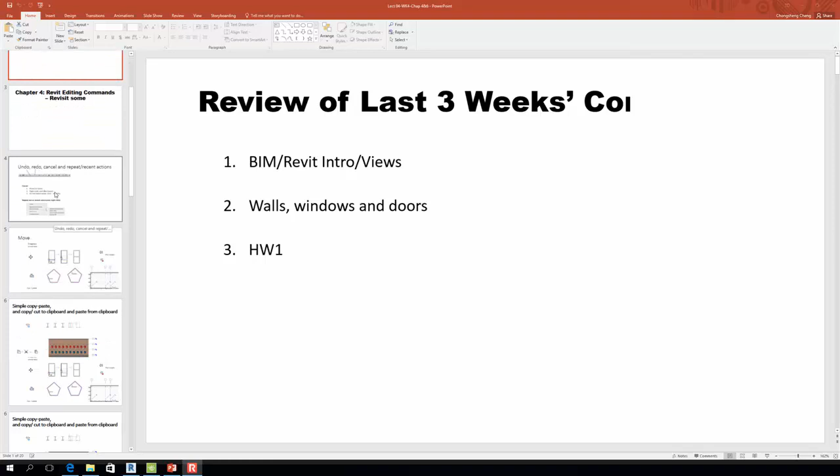So maybe in the first couple of weeks we try to bring everyone to the same level. I'm going to continue to do some review, especially the view part, and also the wall, window, door part. Then we'll move on, and also part of the editing - some editing commands - then we move on to the floor part. The editing part is important, but I don't think it's worth having a full lecture just covering how to trim stuff, how to cut stuff. I don't think that's a good way to deliver that.

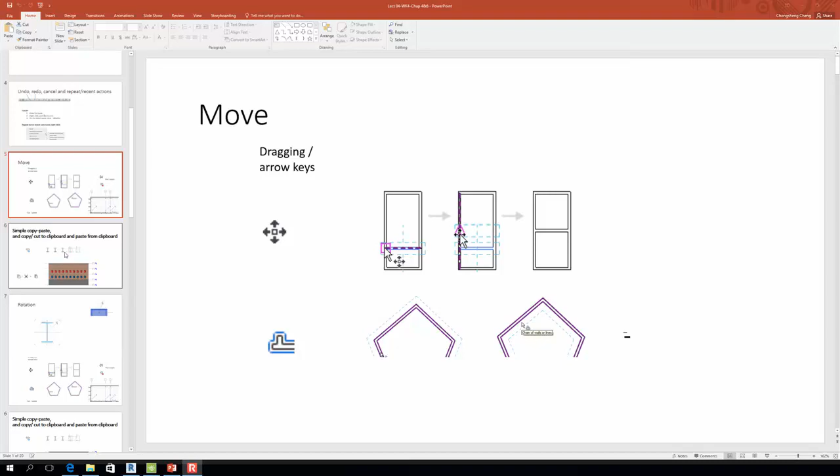So instead, I'm going to try to mix those editing commands with the bigger topics we talk about - wall, window, door, floor, roof. I'll try to mix the editing commands with this bigger topical content. Hopefully that works.

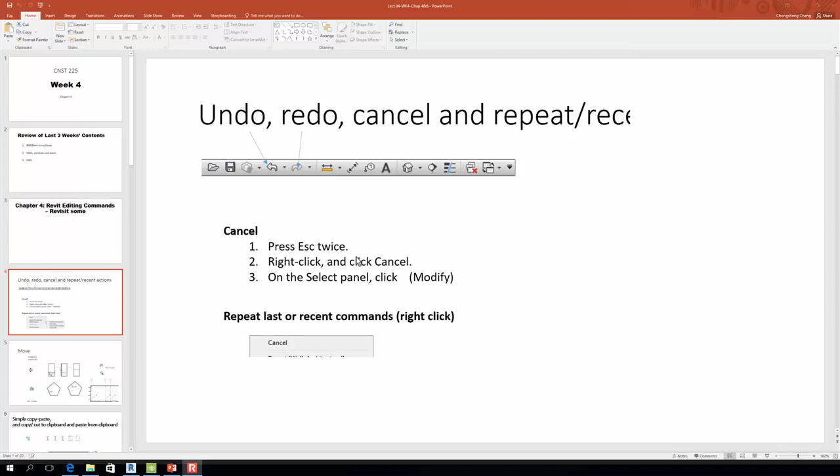Okay, then as I said, we're going to take some time and also learn some new stuff in the floor part. Before I start, I want to say it again: for this whole class, we only use architectural templates. And second,

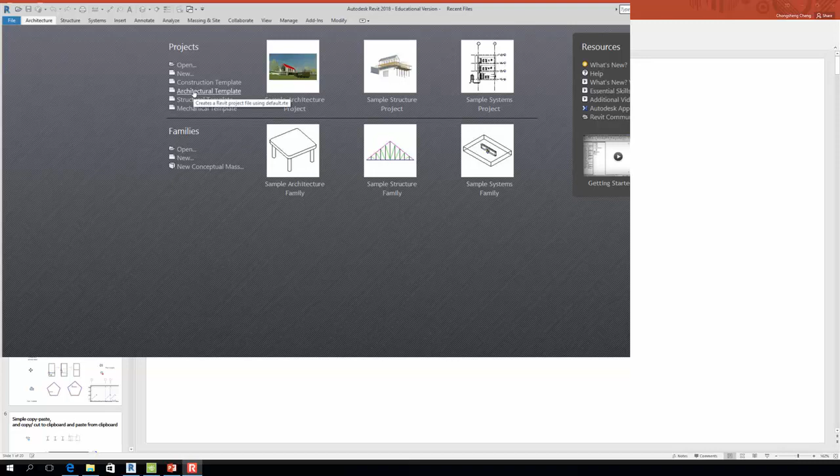all your homework, any assignment, you're supposed to save as a project file. Project file means RVT - Revit file. So when you submit it, you can see the only format you can submit is the project file, RVT. If you save as a template file, you're not able to submit. There's a good reason for that. If you go to the architectural template, that actually creates a new project for you.

As I said, I'm going to do some review. I'm not sure if everything was covered by the TA in lab time, but for example, this interface - if you somehow accidentally close this, say you accidentally touched a button, then your property window is gone and your project window is also gone, how are you actually going to get it back?

Remember, this is a view question. If you go to View, there's a user interface option on your far right - that's where you put them back. You can see the project browser comes back, and then you see the property browser. Try to keep these two areas active - keep these two browsers open. Most of the time you need to do that.

That's how when you accidentally click on something, you can get it back. There's another one called the system browser, and you can click on that - you can see there's something here.

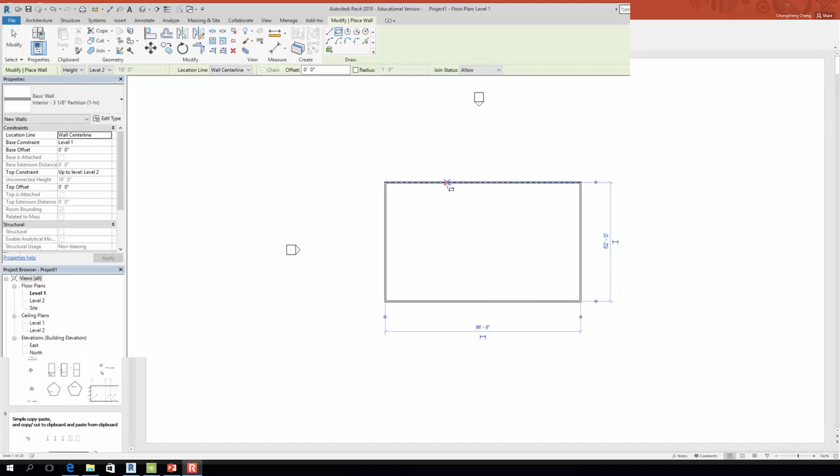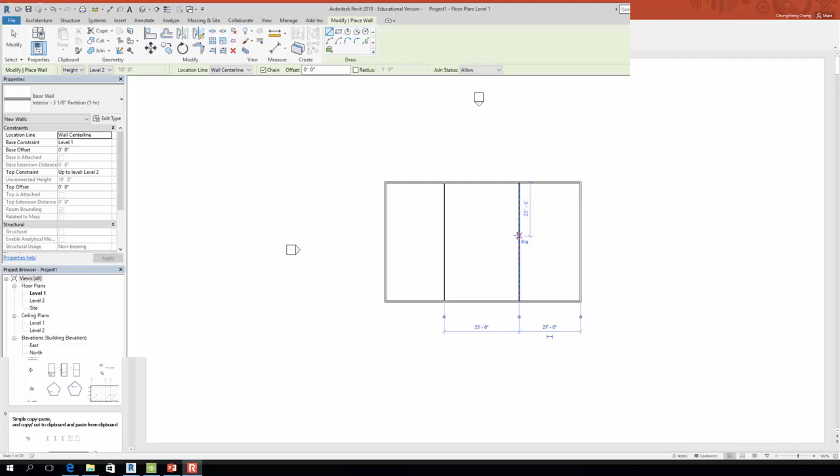Then you go to draw an interior wall. Pick 3 1/8 inch, or whatever, 4 inch, and just make sure it's an interior wall. Just randomly draw a couple. Sorry, you need to use a single line instead of a box, otherwise you're going to have another box. So go to a single line - you can do something like this, just do some kind of random stuff. If you want to draw a little more, you can draw a couple more lines, maybe one more here.

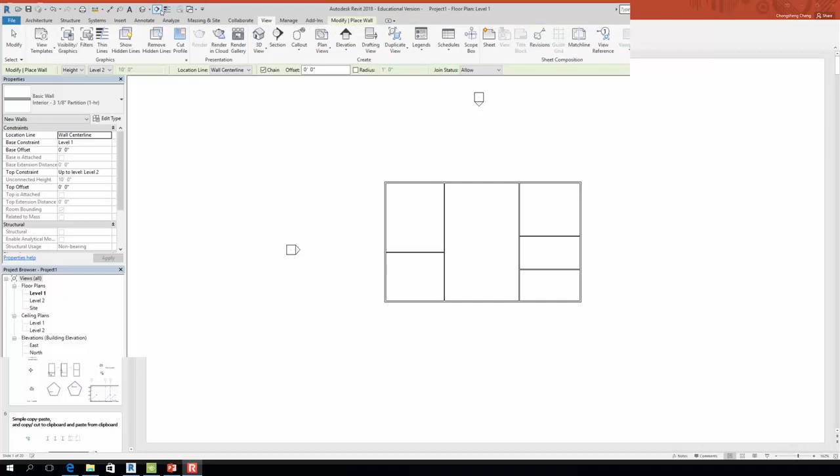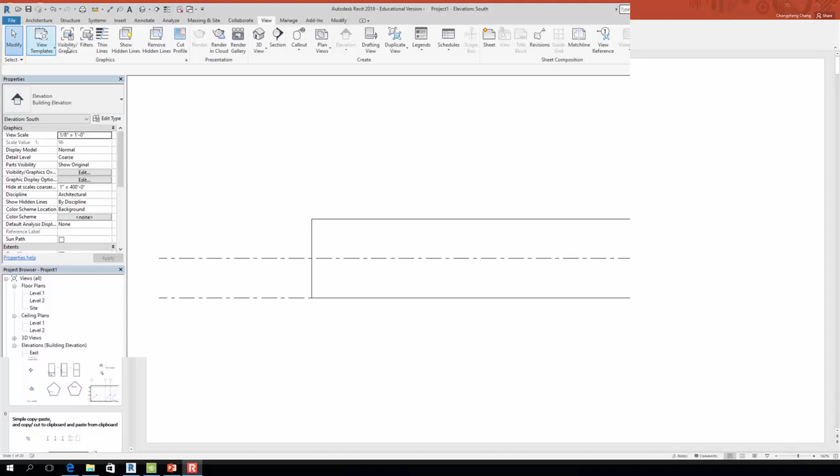So first thing I want to show you is, let's go to view again. Go to view, and of course you want to do 3D view like this. That's fine, and you can see this one. One thing you probably notice by default - your exterior wall height, go to south elevation, you can see your exterior wall height by default is 20 feet, and your interior is 10. That's by default, defined by the architectural template. They define the default value. So interior is 10 and outside is 20, exterior is 20.

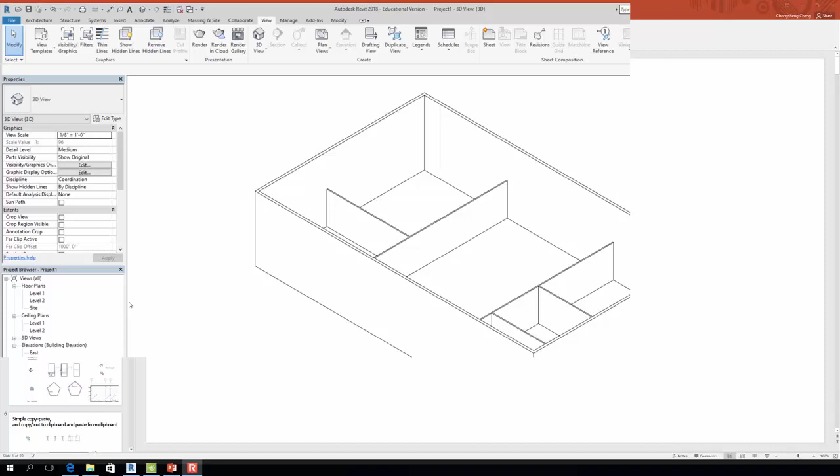Okay, so a lot of time actually when we draw this stuff, we have to switch back and forth - I go back to my elevation level 1, and then I switch back to another level. So a lot of time we prefer to have what? What if we can simultaneously see all the different views? That will be nice, convenient. So later on I'm gonna show you how we can get there.

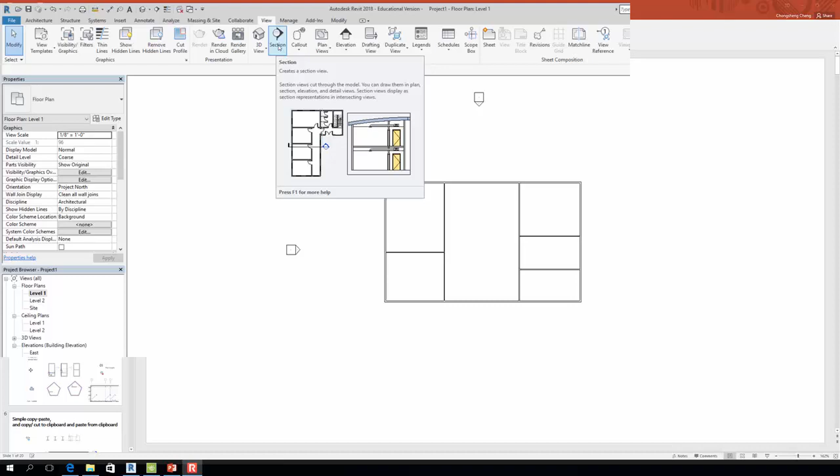But before we do that, let's try to get a section view. Go to click on section, of course click on view first. Section - I believe you might already did something. Let's do a horizontal section view. Of course, you can move this a little bit if not in the exact location you want. This section you can see with a dash box represents the view range.

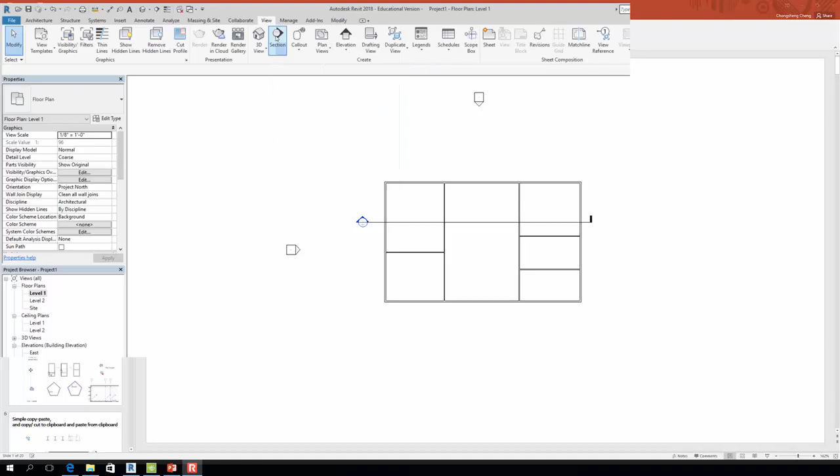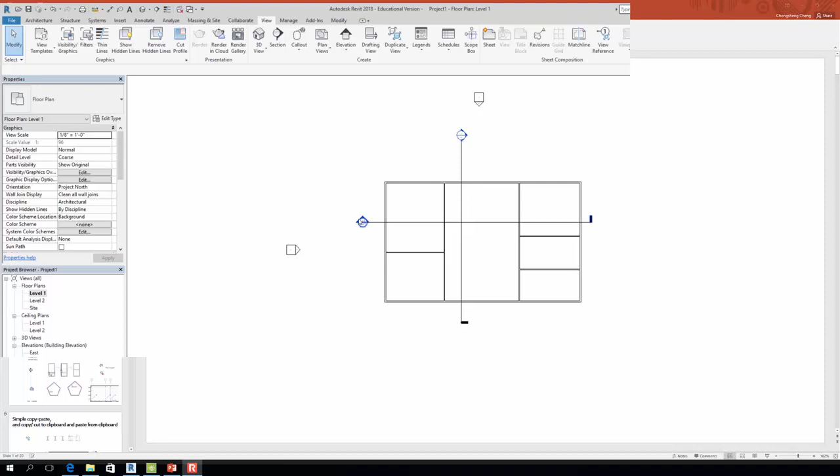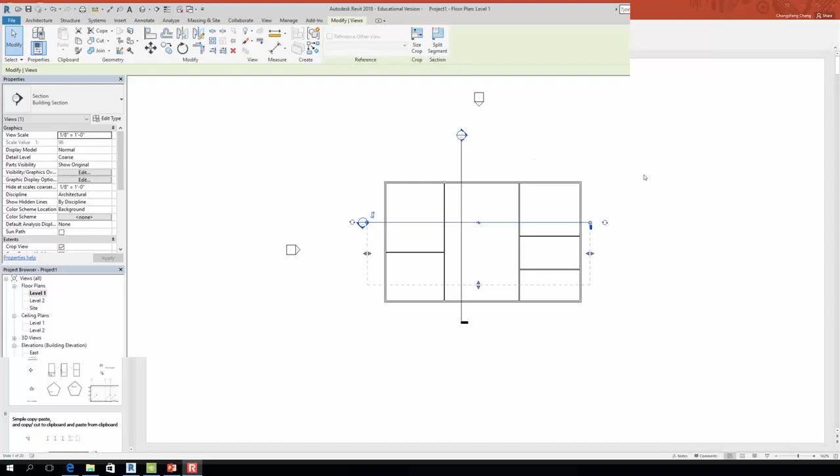Then you can draw a - click on the view, and section. Let's draw another vertical section. So go there, you can see you have another view box. This view box defines how deep you can see, how far you can see, and also how wide - that's the view box, the second view box. The direction, for example, the direction of this triangle defines the view direction. If I want to look to the bottom side, I click this one, so flip the view so it looks to the other side. You can do the same thing for all of them. Okay, that's the view part.

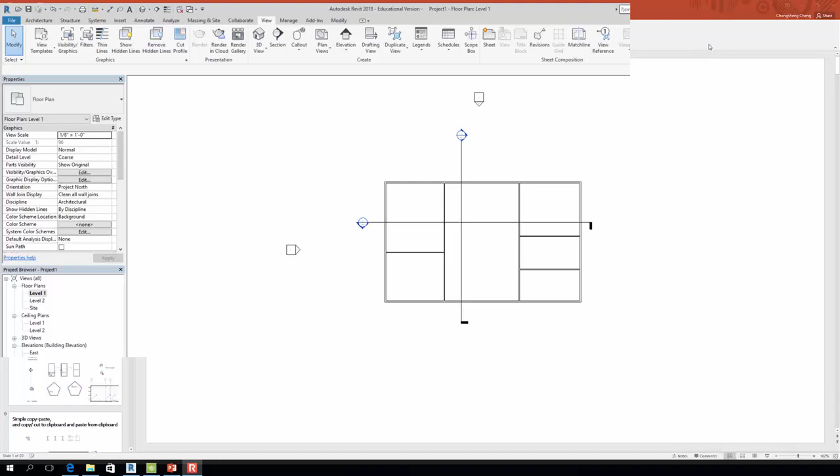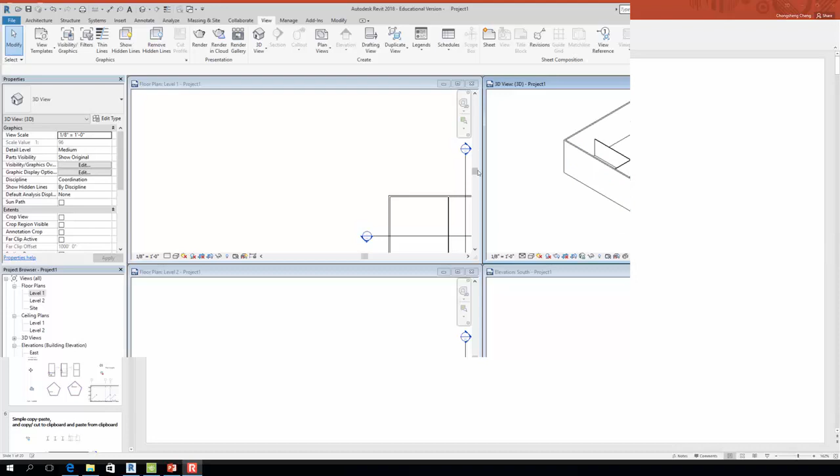As I said, sometimes it's convenient to have all the views available simultaneously. So how are you going to do that? You go here - there's a way you can do a cascade, like this, and of course that is one way. But a better way, a lot of times more convenient, is to do a tile. So you can see when you do a tile, each view you can edit independently. Changing the view on this one will not affect the view on the other view, because they act independently. So for example, this is my first level 1 view, this is my 3D view, and this is my south elevation.

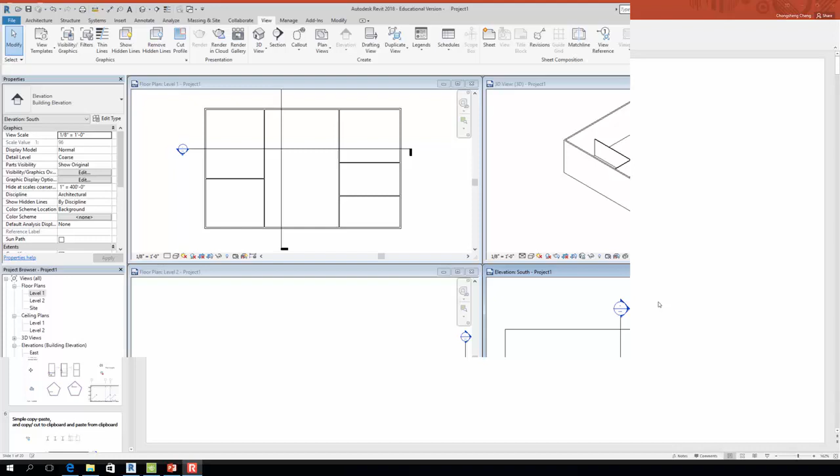All right, my south elevation, and I can make it smaller. This is my level 2 view, right?

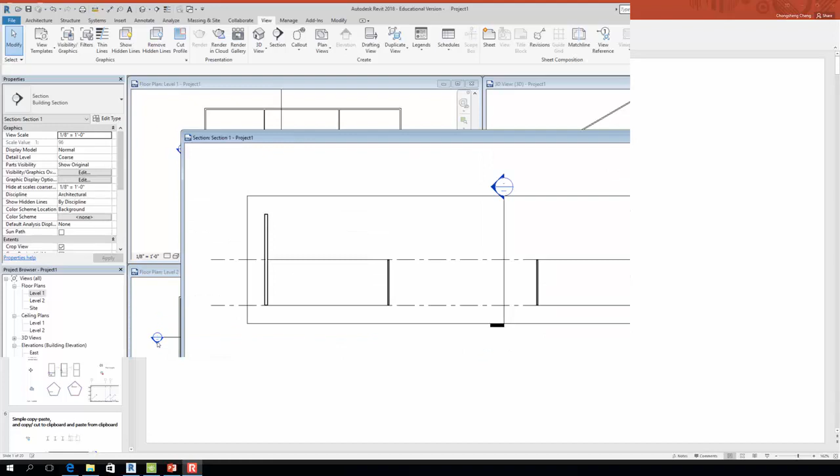What about, I want to have a section view instead of my elevation level 2 view? So let's assume we want to actually have a section view with this one, section 1 view. Then we double click on that, and we have this section view.

So we can actually turn off the level 2 view and tile again, this way we can have a section view replace the level 2. You probably notice no matter how many windows you open simultaneously, you only have one active window at any moment. That active window you see in a darker color, in this case my section 1.

And if you click on this section 1 view, you'll notice this line actually defines your crop view. It's not a part of your building. So if you don't want this box to confuse you, you can turn this off.

See, crop region, you go to your property window, there's a crop region, visible, you can turn this off. See that? Now the box is gone. Everything you see now is part of your actual building.

All right. But did you feel some kind of strange stuff here? If you take a look at this section view, do you feel anything wrong? Yes? No? No idea? I feel kind of odd, because where is my back wall?

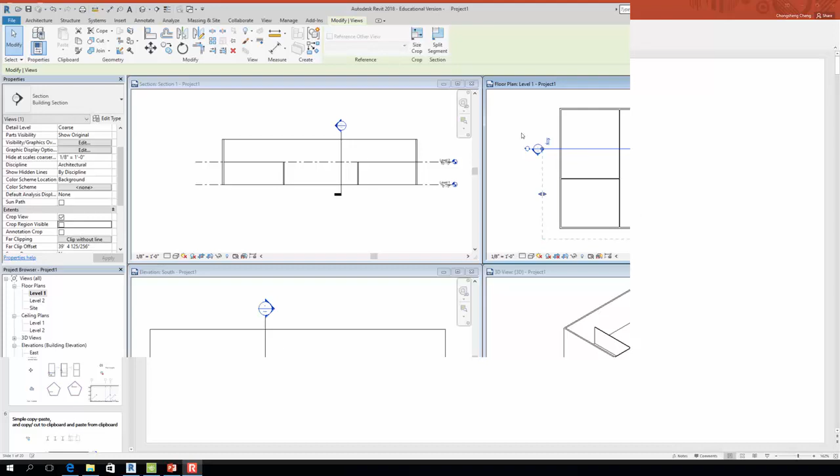So if I drag this here, that wall is gone. That means this box actually defines how far you can see, and what you can see. Of course, if you want to make it narrower, you can drag this one back and forth to make it narrower. This way you can make all the views available.

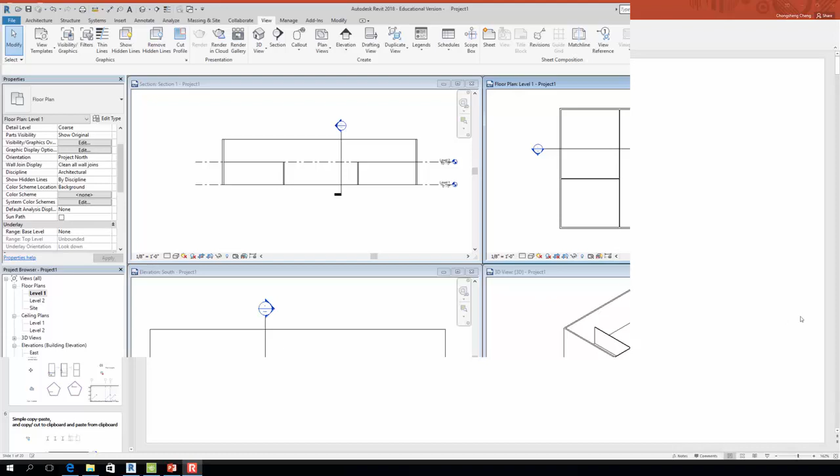So let's talk about selection. I know it's hard to cover this miscellaneous command at the same time, so let's just talk about how to select an item. There's multiple ways you can select an item.

For example, on the floor plan, I can simply click on this, I select this wall, right? You can see the blue. I can select this one, I can select this one.

What about if I want to select multiple? There's a lot of ways you can select multiple. One way is, hold my control key, I can select 1, 2, 3, 4, 5, and select multiple.

But what about when you have 100 items? And that's not uncommon, right? I have a lot of items in the floor plan, so it would be time consuming to select all of them. So then we have a second way to do selection.

For example, if we want to select the same type of wall in the whole project, what you can do is right-click on one item, there's the select all instances option. There's two options in select all: one called visible in view, and the second called in entire project.

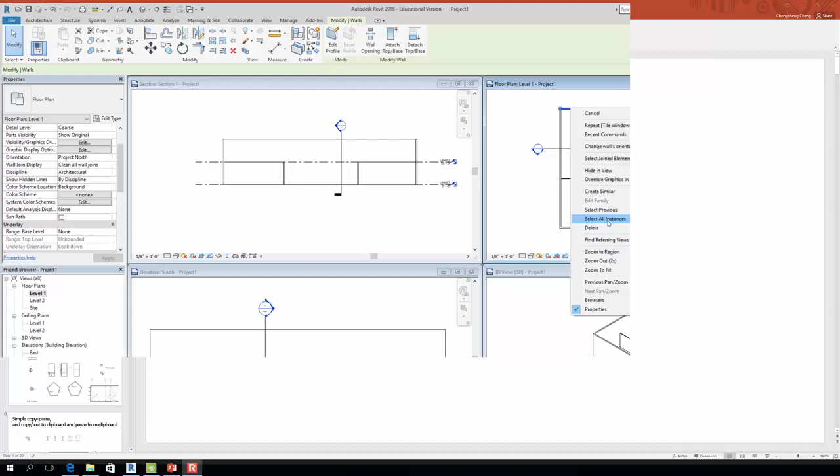One option just selects things visible in this view, the second actually selects the wall in the whole project. At this moment it makes no difference, because we didn't have anything outside of the view. Let's go ahead and select either one of them. All right, okay, see all the walls, exterior wall, same type, selected.

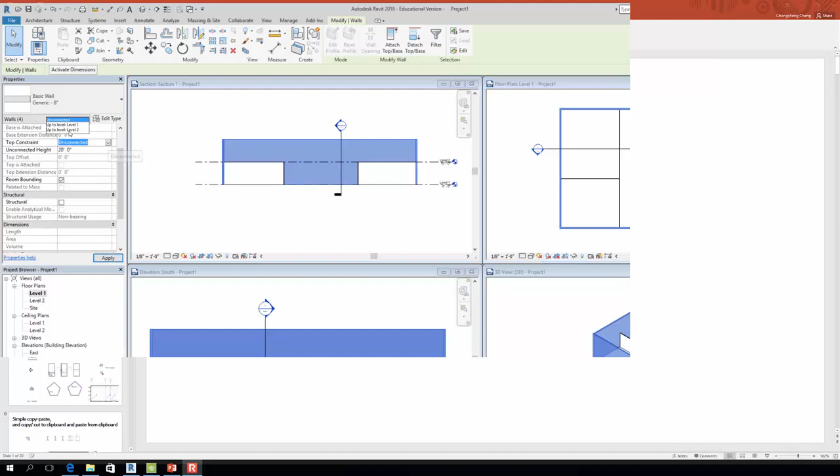All right, let's make this one only reach to level 2. By default it's unconnected. We said, okay, here's the top constraint, unconnected, let's make the top constraint level 2. So we set this top constraint to level 2.

All right, you can see from the 3D view, it's changed to the same height as your interior.

You can do the same thing. You do the same select all, right, and do the interior. Click one, you say select all. Yeah, you can do the same thing. Let's unselect that. So this is another way to select items.

But sometimes you prefer to use what's called window selection. What does window selection mean? You hold your left mouse button, pick one point, hold the left button, and move slowly. See what happens.

Why do these three walls turn blue? What's the characteristic? It's enclosed in the box, 100% within the box. If it's not 100% within, it won't be selected. Notice this is a solid line, a solid gray line. So everything 100% within the box will be selected. You cannot be partially within the box.

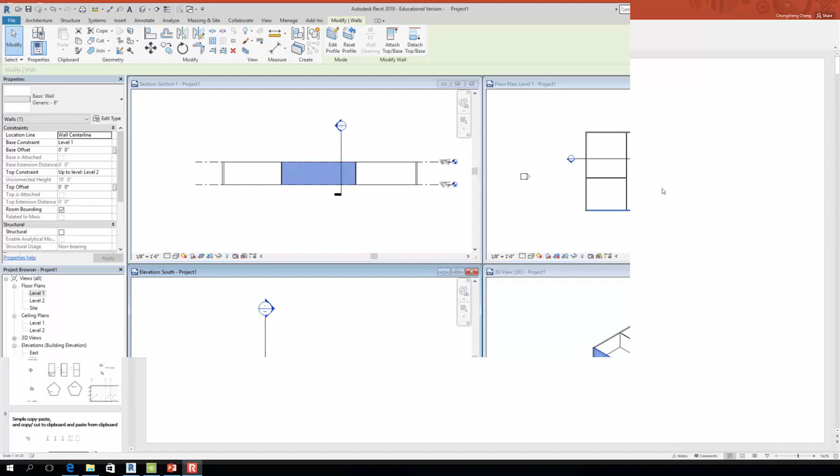But what about the interior side? The interior side, you cannot use elevation to do the cut, because elevation only lets you see the exterior wall. So for the interior wall, let's see, if we want to cut something on this wall, you can see this wall. Let's move on.

I believe this is our section. Yeah, this one. This is section 2, right? So this is our section 2. We want to actually add an interior opening. Let's click to do the edit profile again, and let's assume when we want to do an opening here.

We use single line, right? We just add a kind of, let's assume this is a room, this is a drywall. So let's briefly talk about editing.

In order to cut a door opening like this, I need to remove this section of the line. There are so many different ways you can remove that section of the line. Of course, one way is I can delete the whole bottom line, then draw another line from this point to this point, and this point to this point. That's one way to get rid of that.

Or I can use the trim command. There's a trim, so I can pick this one and this one, then this section of the line will be gone. But I have to redraw this part.

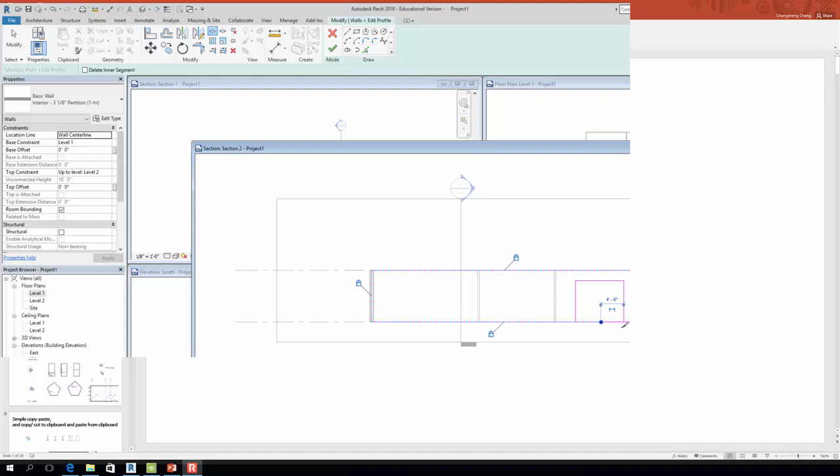So I typically use split element, then you will see a knife. The knife means you're going to actually split the line at this point. It looks like still one line, but if you move your cursor on top of that, you can see it became two pieces of line.

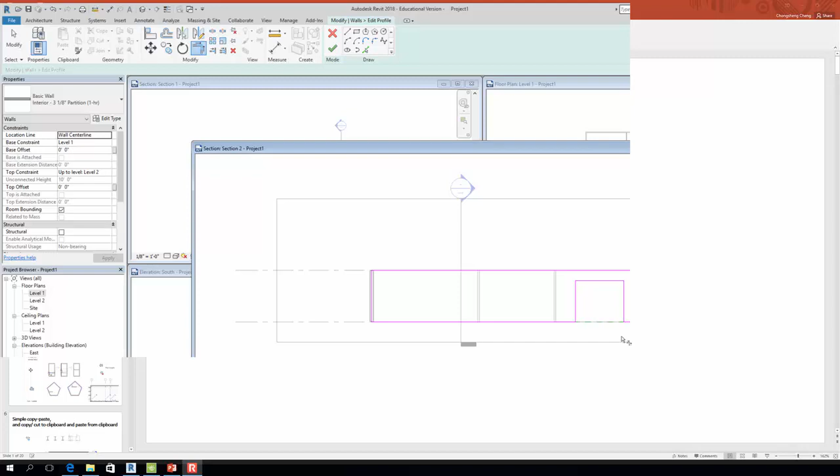So then I can use my trim command. You can see two arrows, and then you can do it. When you do the trim, make sure you click the side you want to keep, not the side you want to get rid of. I click on this, you can see, right? Now for this one, I should click on which side? This side, right? This side is the one I want to keep. So I have an opening like this.

So you see done. Now let's take a look at your 3D view, right? You have this opening. So what's the difference between this opening and two walls? You may say, okay, is this two walls or just an opening? With an opening, you actually have a header box. With two walls, you have no header box.

Okay, that's one way to make an interior opening. Let's try again - what was the knife and the trim on the edit profile? That should be in the modify button.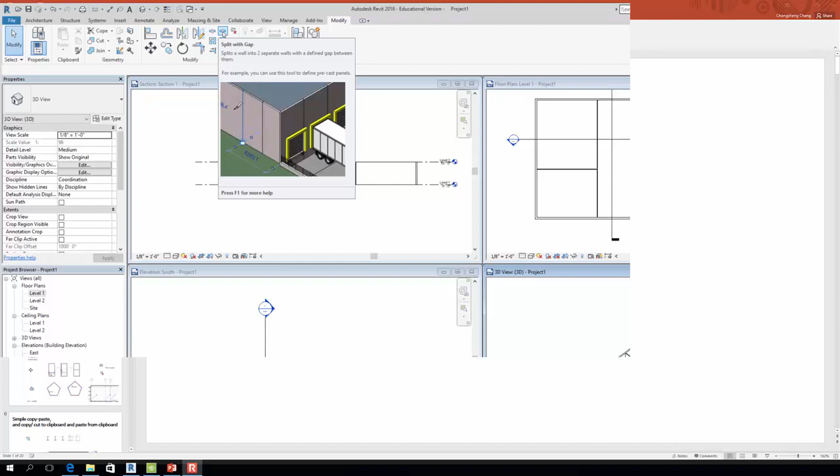Okay, you see that's the split, right? This is the one knife. There's another knife here, right? This one is split with the gap. You can see this one I just showed you is just 1 point, right? This one you have 2 points. See, 1, 2, right? And there's a different way you can do that.

So any other questions? This is one way we can make an opening on the wall. Let's do a second way - second way to make an opening in the interior wall.

This will involve a load family command. Let's click on architecture and door. You may be wondering why we click door - the reason is an opening can also be treated as a door without a swing, so without a panel.

When you click on door, this is how many options you have - you only have the single flush door, right? That's not what we want.

Remember, the power of Revit is they have a huge collection of predefined elements you can use. Same thing for the door. But it's not very efficient if you preload everything, because that slows your computer down. So instead, you only load the things you need. In this case, if we need a door opening, we go to load family.

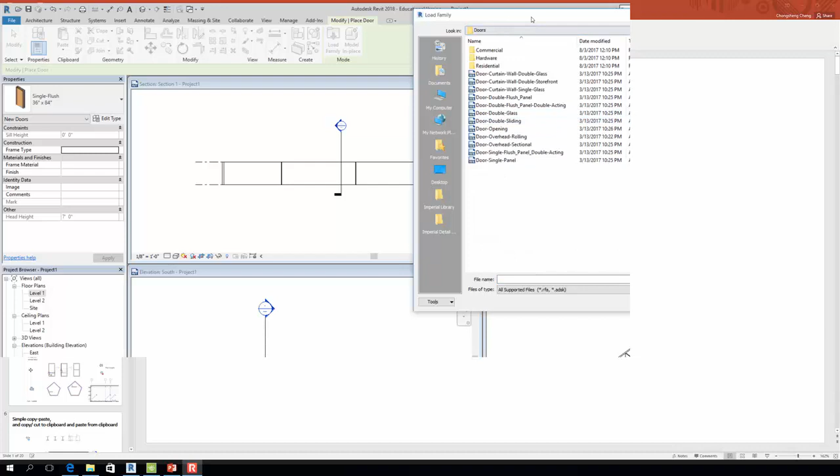Typically you go to US Imperial, and you go to doors. And what you see here is there's so many doors. Let's simply browse those - double glass with frame, single glass like our classroom door, and those types of stuff. There's an opening - you can see this one just has an opening, but without any frame or panel. So this is opening, and of course you have overhead door.

For residential, there's a residential folder that contains a lot of residential doors. You can see there's a French door with the sidelight, and sidelight with arch on the top, and then you have all kinds - this is what a typical garage door looks like, with embossed panel, raised panel. Of course you have those sliding doors too.

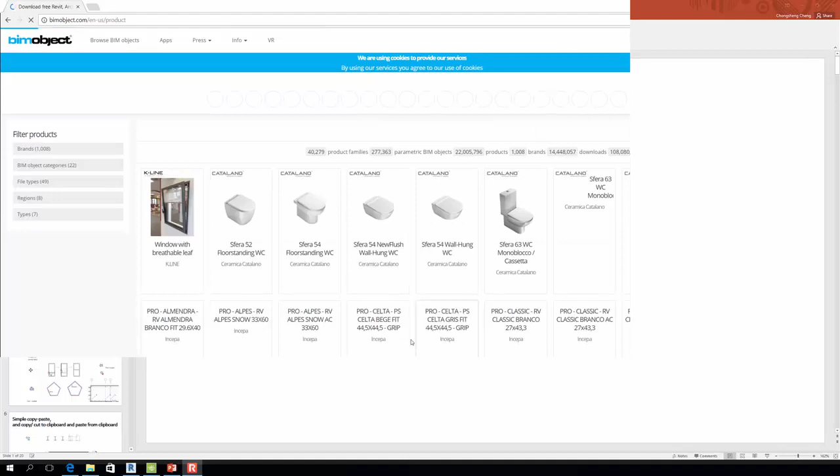If you go there, you can see there's 22 categories. There's a region category - if you go to region, for example you like the European style stuff, you can see in Europe, European style objects there are 21,000. North American is 31,000. Middle East is like 13,000, and that's the library. You can see Australia, Asia, especially if you like Japanese plumbing fixture stuff, you can go there.

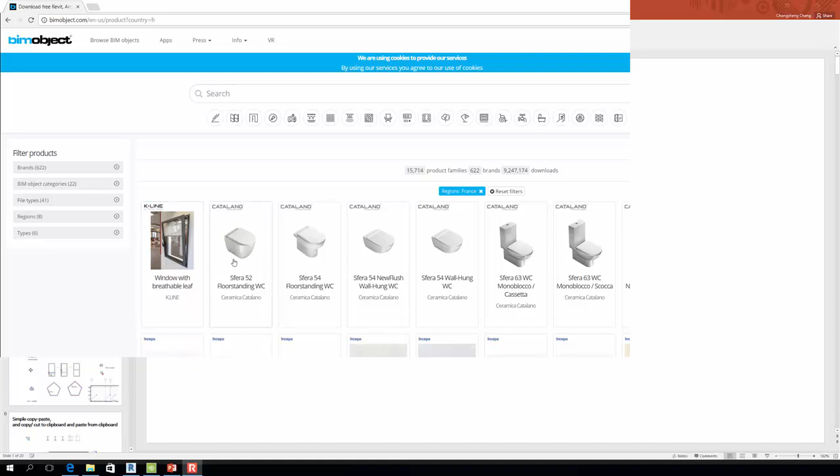I'm pretty sure there should be a Japan somewhere - yeah, there's one, 20,000. So there's a lot of BIM objects. How are you going to use this? Well simply, let's go to France - let's say 15,000, let's apply. So let's take a look what the French people give us. Okay, and this toilet is kind of rare in the U.S. - it's a European style toilet, and actually you can see a bunch of them.

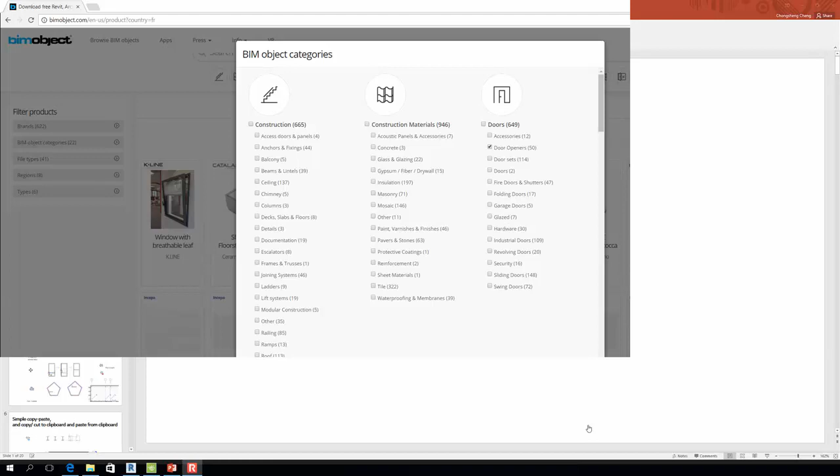Windows - you can see by category, all kinds of stuff, construction material. So what you need to do is, for example for the door, there's a bunch of doors over here. Even door opener - you can see, okay I want to see how many door openers they have over there, then you have a bunch of door openers. So then you can say okay, download this one - I can simply download this one.

So save this file to your library, right? To your library.

See, I have a Revit file. Then you can download that one. Of course, you probably need some time. RFA, right? RFA means family file, right? Everything in your library folder is an RFA file, right? Let's download that one. Where should you download it? You should download that to your hardware folder, right?

I think you need to register. You can use the same username or the email you used when you downloaded that free software, right?

This is pretty much it. You can save it, allow it. Page expired, okay, anyway, but you got the idea, right? Roughly. And you go to download and save that to the folder, like in your email.

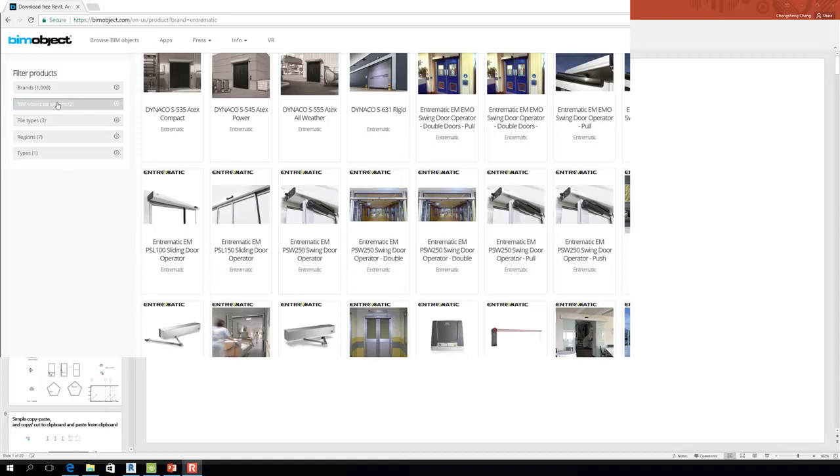All right, but just keep in mind, if there's stuff still not available, you can go to the online resources. There are tens of thousands of online family library files you can download. Just download it and save it to your folder.

See the landscape and this kind of stuff, there's so many items. And you guys remember this one, right? Autodesk Seek, they'll bring you there, or you can go to bimobject.com. I think it will give you the same location, right?

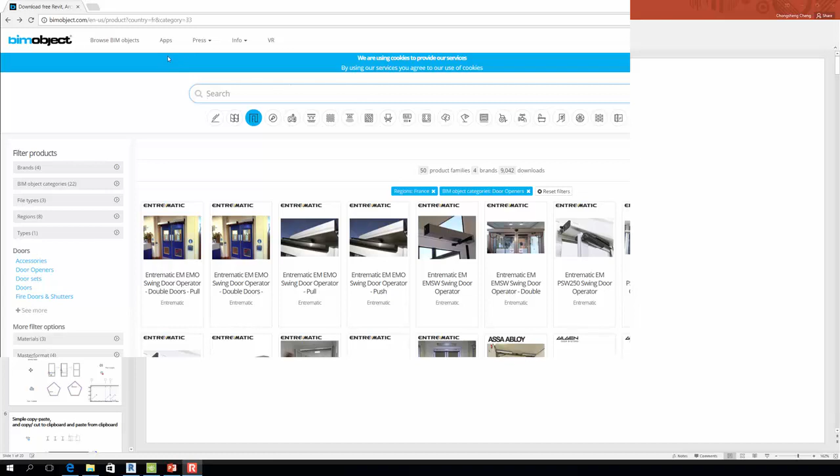That's about this one. Let's now go back to Revit and load the door opening.

By the way, you can load all of them if you want. For example, I select the first one, hold my Shift key, select the bottom one, and I've got everything selected. But as I said, if you select everything, it will slow your computer down.

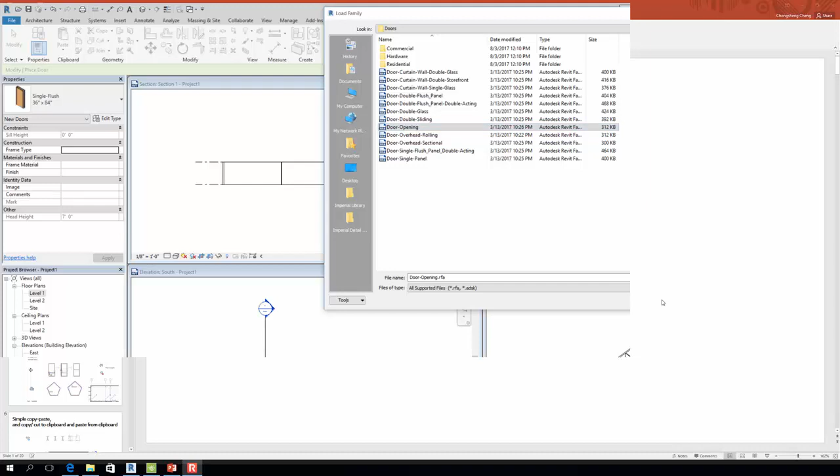So let's just go to door opening, single selection, right? Then you can see your door opening here, right?

So let's add another opening. Make sure you have Level 1 active. If not active, you cannot add an opening, right? Let's add this one.

Right, you can see your 3D window. You can already see this small opening, right? What if we want a bigger opening?

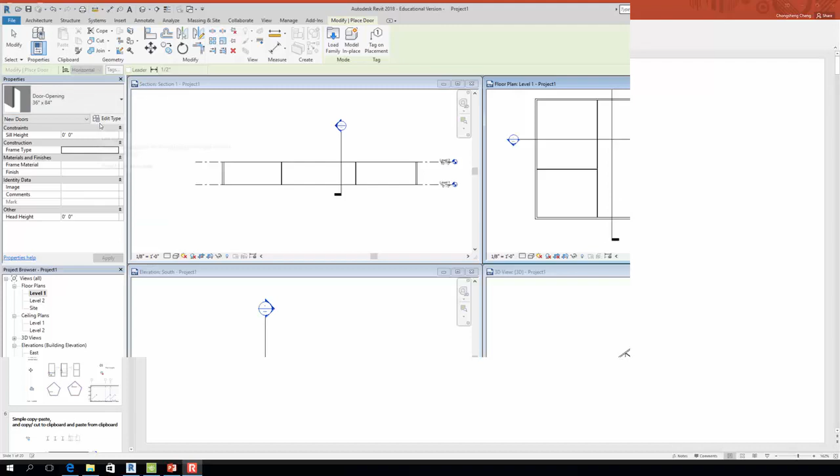Bigger opening, let's do an edit type, just the same as you change your door or window size, right? Let's click on edit type. Do not modify the existing type directly. Instead, always do a duplicate. The duplicate actually allows you to create an extra, so you don't have to worry about it, right?

Let's say Week 4, right? Week 4, we want to do an 84 by 84 opening instead of a 36 opening. 36 is 3 feet, we want to do 7 feet, 84 by 84, right? We give it a name. Then let's change the size. The rough height is 7. Let's make the rough width also 7. Say OK.

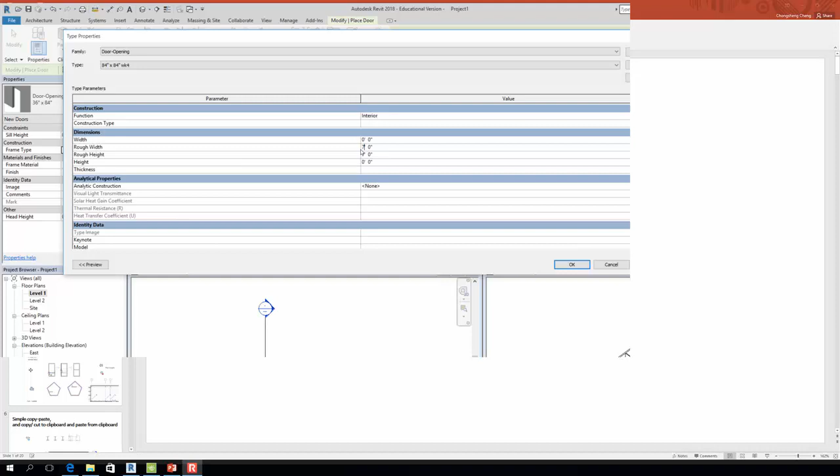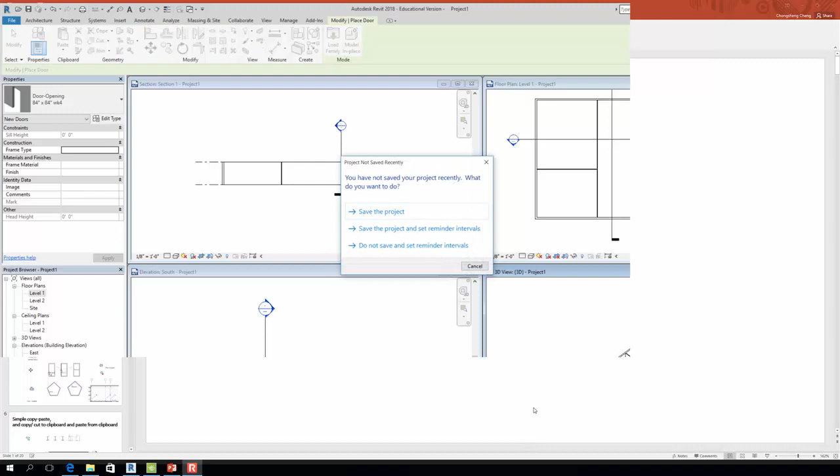Let's use this one, 84 by 84, add that to this room, right? So we click on that, you can see it's there, right? That's 3 openings. So for the interior opening, right?

There's multiple ways you can do this. For example, can you add an opening from the section view? Yes, you can do that.

Same thing, too, right? For example, you want to add - first, make sure you know what this section is about. Then you can go to, for example, door opening, and make sure this section view is the active one. So you can see now, there's one.

Okay, and oh, big trouble - add one to what? To the exterior, right? So that's why you better know which one you're looking for. So you add something there, right?

Okay, I think before we - so our class ended at what, 7:45, right? So that means we have 25 minutes. Okay, we should have enough time.

All right, let's give you a couple of examples on how to customize stuff. I'm going to talk about two things: one is how to modify a wall, the second is how to modify a floor. But before we actually modify a floor, let's first create a floor.

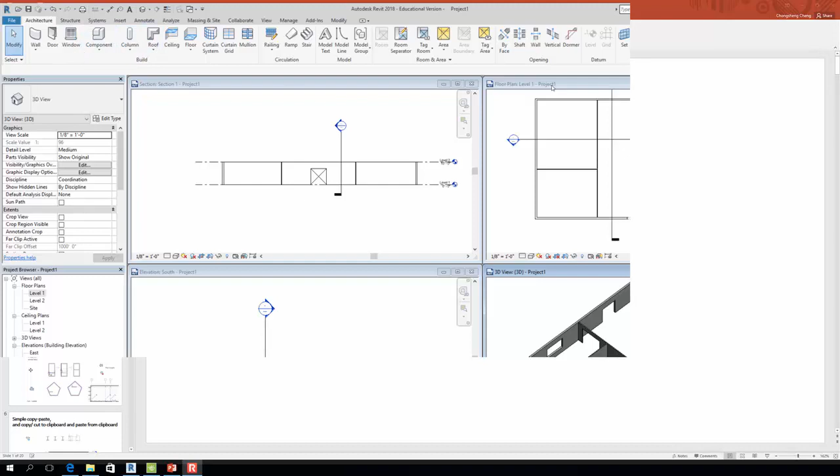Let's do that. Go to Architecture. Make sure you are in the floor plan level. Floor plan level, go to Architecture, then go to Floor, then click on Architectural Floor.

So what do you notice? This time it's different from your door, window. Everything grayed out, right? That means you are in sketch mode. So floor is different from the wall. The wall you can simply draw from one point A to point B. But the floor you have to define, because the floor is a thin plate, right? It's a plate, so you have to define the profile of the plate.

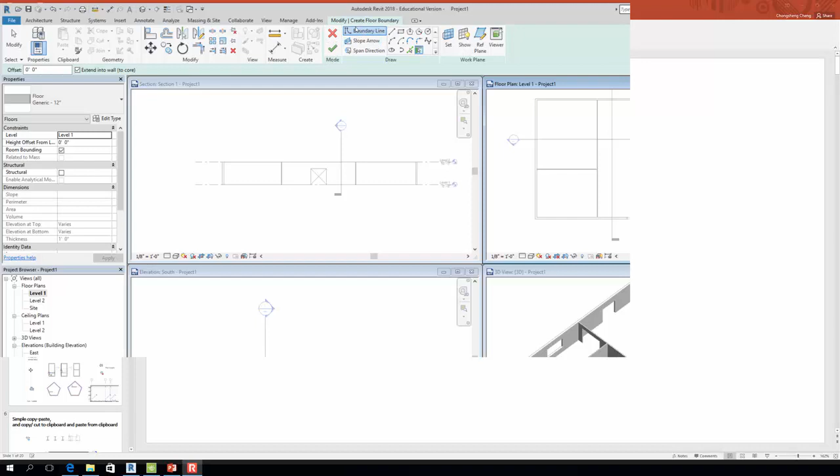So this way you can draw the floor. When you click on the floor, you can see the boundary line highlighted, which means you need to create a boundary of your floor using one of these tools available. For example, you can draw a single line, one line, two lines, three lines, four lines. Or you can draw a box, just like I draw the building, I can draw the whole box. Or you can use select, by picking a line or by picking a wall, you can also draw a floor.

Let's use pick wall. Click on this button, pick wall. Actually, this is the default method. By picking wall you don't worry about it, because you simply click to tell the computer which wall you want to surround this floor. This wall, this wall, this wall, this wall.

So after you click on the wall, you see a purple line, and there's something different, there's a double line. What does that mean? That's your span direction. When you have a floor, you have a span direction. At this moment don't worry about it, we'll probably talk about it more when we deal with structural elements. Just be aware this is a span direction.

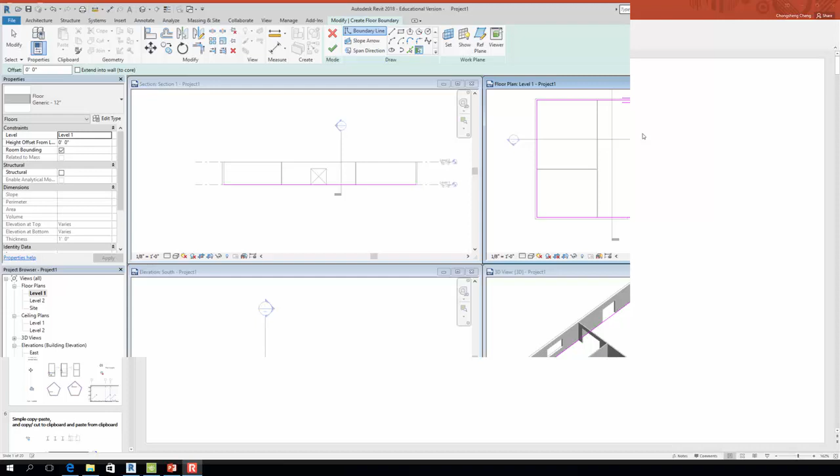What's the span direction? What is that indicating? The span direction, typically, for example when I create a slab, I have a support. You could have two wall supports this way. If I have two walls supporting this slab, the span direction is going to be this way, perpendicular to the support. If I put two walls below, the span direction changes accordingly. Either way, it's going to be one-way in that direction, but without considering the loading, let's not worry about it. You can change the span direction by doing this.

At this moment, just say okay, finish. Right now you got a floor, and this floor, you can tell we didn't extend it into the core, because it's within the perimeter of the interior side of the wall.

We said we're going to learn some new techniques. Probably you already learned some about how to customize or modify a wall. Let's give you extra exercise. This wall is called Generic 8. What does that mean? There's no material defined, there's no structure defined, they only call it 8-inch. We don't know what the material is, it's generic. What if we want to modify this wall? We want to make a CMU backup brick veneer cavity wall. Let me show you how to do that.

Let's first select this wall, this 8-inch one, then click on Edit Type. Maybe the TA already covered this in lab, but I want to show you one more time. As I said, when you try to do something new, always use duplicate, do not modify existing. Just do duplicate, and we call this wall Week 4, let's see, CMU brick. Just give it a unique name, you can put your last name, whatever.

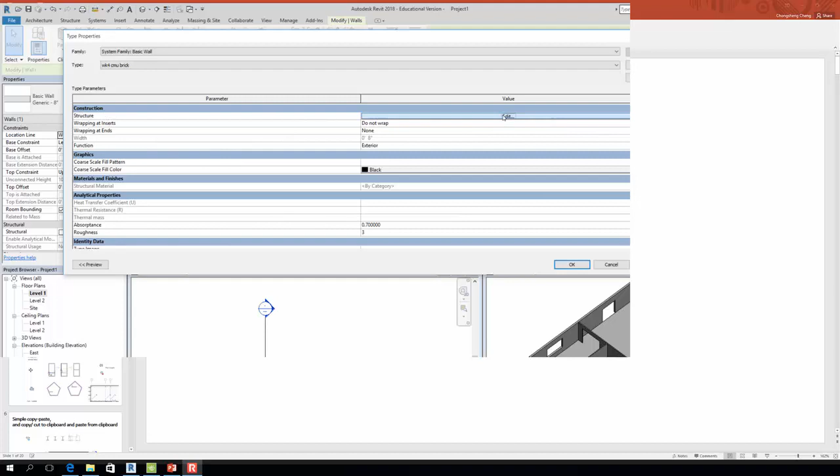So this new type still belongs to the basic wall family, but we can give it more flavor. How can we add, for example, CMU, brick, and a cavity? We need to go to this one called Edit. At the very top, underneath construction, there's a structure. We have to change the structure, click on Edit.

This window defines the structure of your wall. Currently there are 3 layers, right? Two layers actually define the core boundary. One is the structure part.

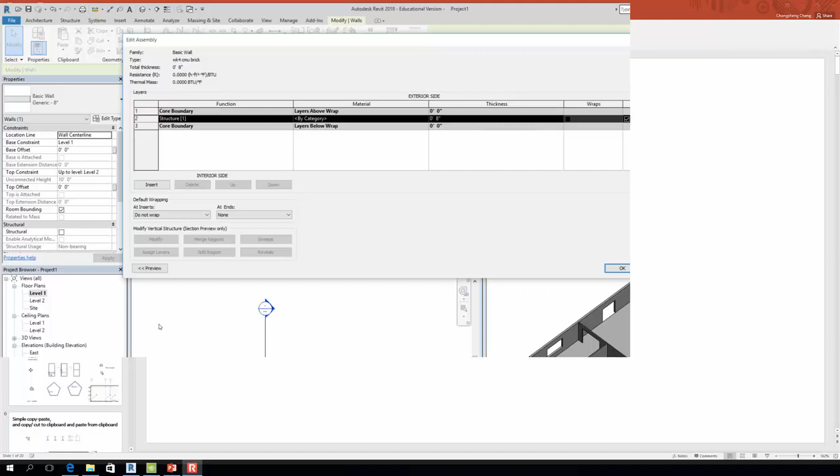8 inch. If you click on the preview, you can see the graphic. As I said, first let's make this material defined.

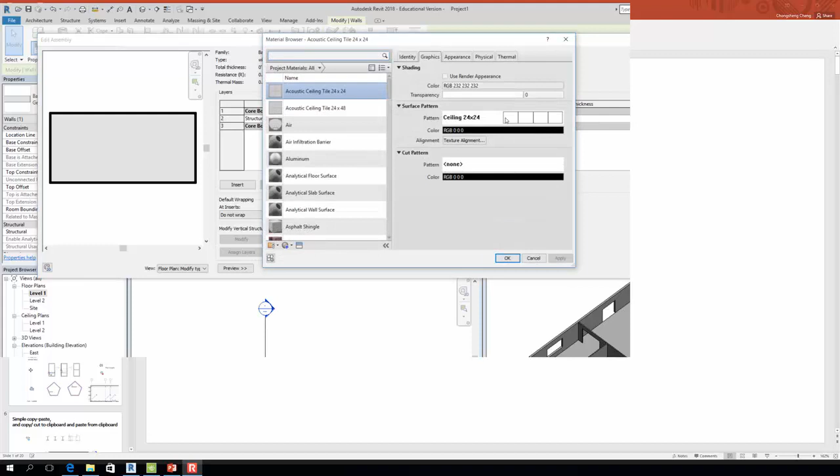Let's make the core structure 8 inch as a CMU. If we click on the material, click on this, there's 3 dots, click on that button. Let's find the concrete masonry unit, CMU, 8 by 16. Now you can see this one changed to an icon of CMU.

Let's add a brick veneer, and your top layer 1 is your exterior side. We click on layer 1, click on insert, and your function of your brick veneer is not structural, it's actually finish. So let's define the function as a finish.

Finish 1 is exterior finish, finish 2 is the interior finish. So we have the brick veneer function as a finish.

Let's define the material as brick, common bond or running bond, the same thing. What's the typical thickness? It's 4 inch. 4 inch brick. You can see this icon change to 4 inch brick with CMU.

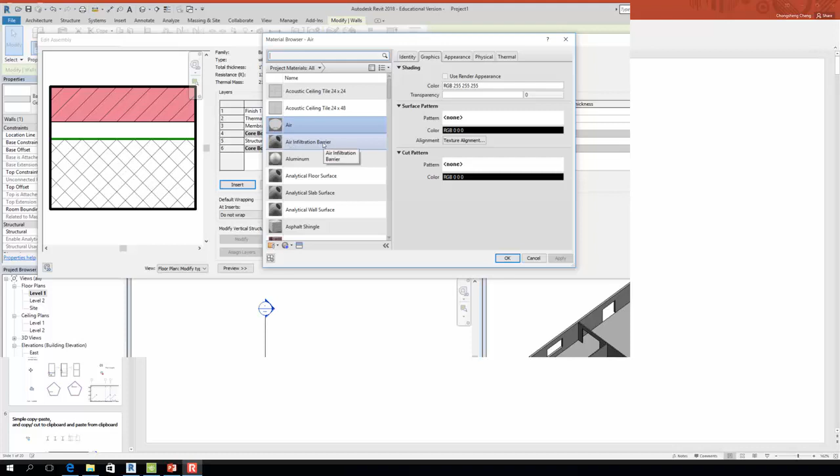This time we're going to add a membrane layer. The membrane layer is a very thin layer. What kind of material? Let's find out - air infiltration barrier. The thickness, this is the only layer you can allow a zero thickness, and because it's so thin, we're going to leave that at 0. But you do see the green line that represents the membrane layer.

So now you have a total of 14 inch thickness of this CMU-backed brick veneer wall.

What about adding studs and gypsum wallboard on the interior side? Then you can continue adding on this side. I'll leave that one for you to do because it's a very similar process, you're just adding on a different side.

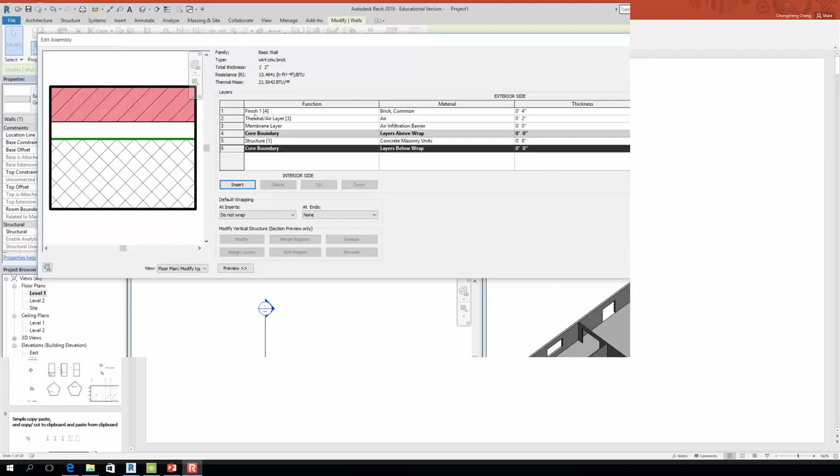If you want to change the sequence of those layers, you can use the up and down. Here's down - if I go down, you can see it move down. And go up, up, up. See that? Down, down, down, up. This allows you to change the sequence, the order of the layers you just defined. So you have insert, up and down, and you can also delete.

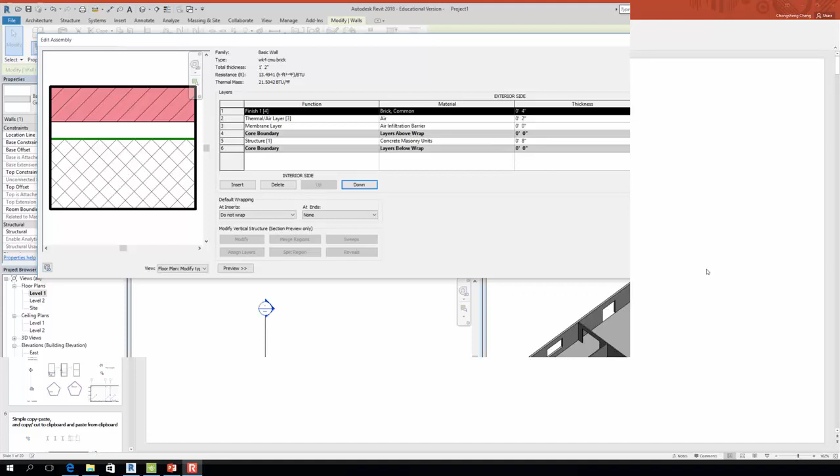So after we get this one, we pretty much say okay, done. And now you see that changed into a thick wall. If you go to shaded, let's see, if you go 3D view, you can see the color change to the brick.

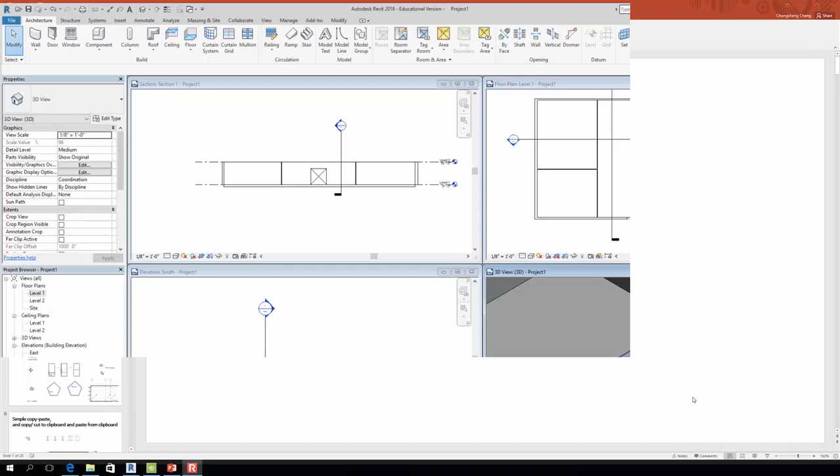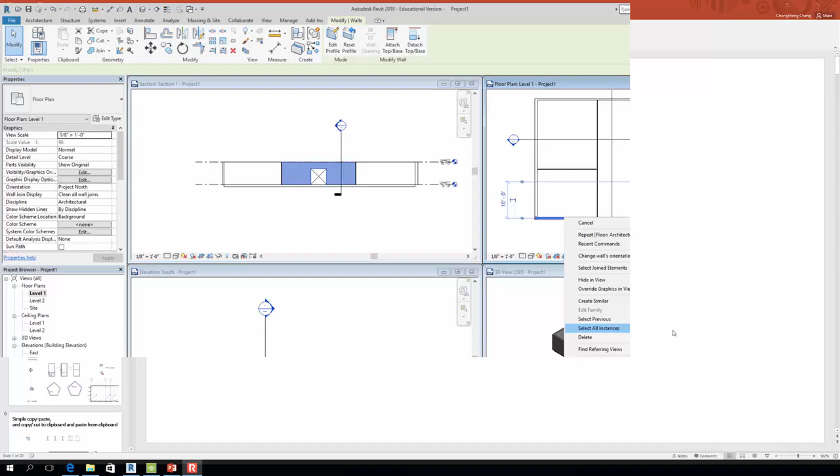What about we want to change all the exterior wall to the same type of brick wall? This is going to use our select method. Let's do a select all. Click on the one you want to modify - this is the wall with the generic type. Right click on that and go to select all instances. You just select once. Right click on a non-brick exterior wall, then do select all, visible in view.

So you can see now all 3 sides, except the brick wall, because this one is a different type of thing - so those 3. Then you go to your...

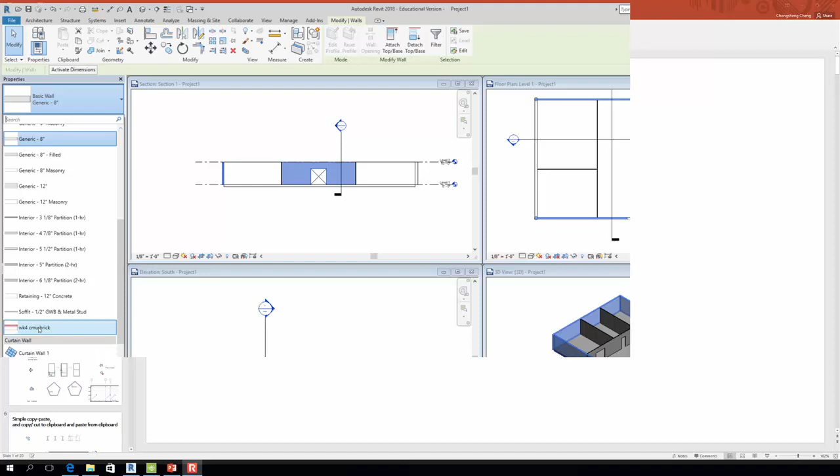Property window, find the wall you just created. I call that WK4 CMU brick - you'll probably call it a different name. Select it on that. And then you're done.

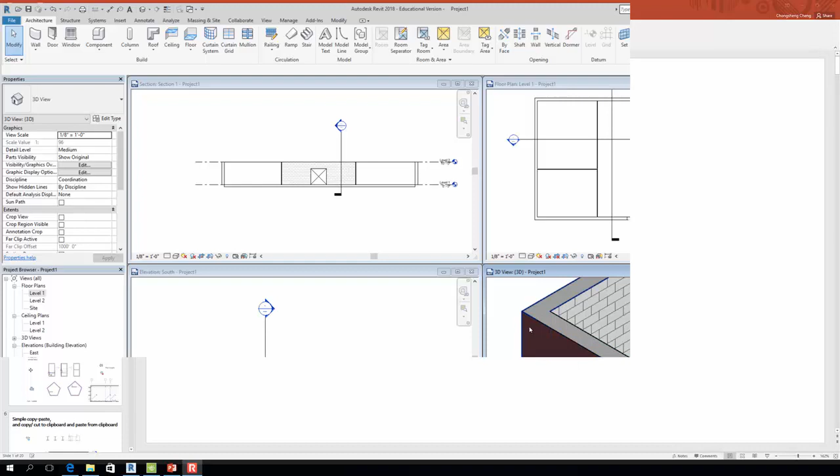You can see now you have the brick wall on 4 sides. Inside, on the interior side, you have the CMU - you can see the CMU is much larger than the brick. In this direction you can see both actually - you had a 2 by 8, I believe, 2 by 8 brick, 4 inch thick. You have the bigger CMU wall.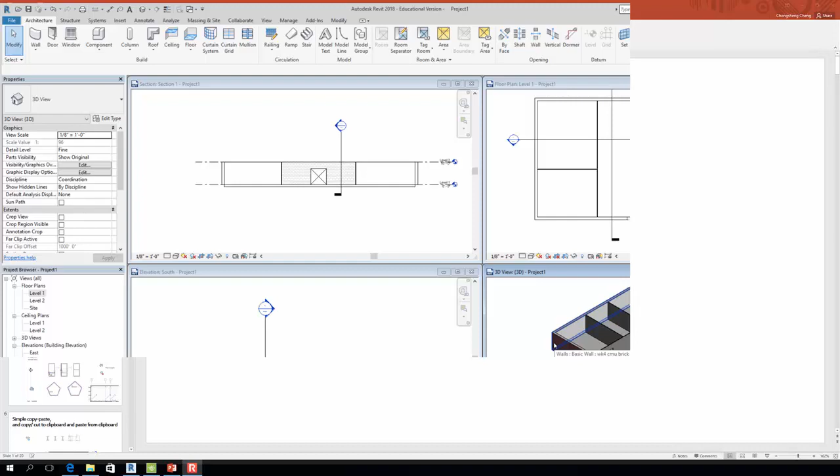And that's okay, that's one way you customize the wall. What about a floor? Floor is the same thing, right? You can do the same thing to customize the floor.

So let's first select the floor we just created, right? And we want to keep this level 1 window active. Let's select the floor. Oh, I forgot to tell you another way to select things. It's a very useful one.

If I ask you to select the floor in this level 1, you see, where's my floor? My floor, I move here, it's all shown as a wall, right? I move my floor, but the floor doesn't show up. What happened?

Because in your computer model, a lot of times in one location you have multiple items. The computer really doesn't know which one you want to select, right? It's kind of like, for example, I move my cursor here, the computer thinks I'm going to select this wall.

But there's a way you can tell the computer exactly which one you want to select: you move your cursor close to this one until one is highlighted. But if you think this one is not the one you want, use your tab key, right?

See your tab key, hit tab key. See, the tab key says, okay, what about this one? If this one is still not your selection, keep hitting the tab key. What about this one, right? You can see each time you click the tab key, your computer is going to move to the next item until you say, okay, this is the one.

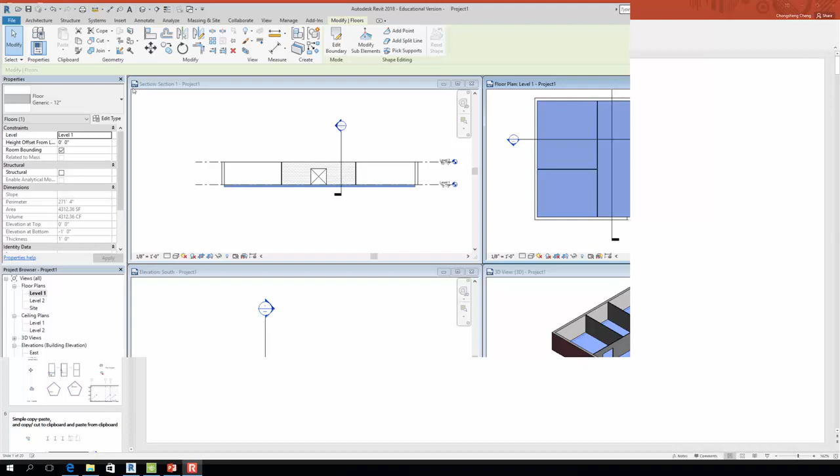So let's first change this one to a concrete slab with wood veneer, right? Wood veneer, wood floor, right? Let's go to edit type again.

All right, and we do a duplicate. That's what we call wood, concrete... wood concrete, right? So click OK. Just remember the name, right?

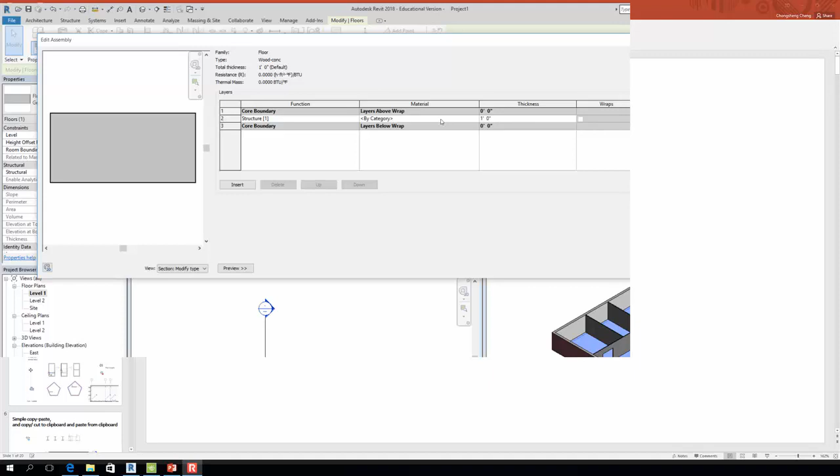So then we do this pretty much similar to what you did with the wall, right? You go to structure, edit. First of all, we need to change this structure into concrete, right? Let's do a cast in place concrete. I think that should be pretty straightforward. Cast in place, great.

And let's add a wood finish layer. Move your cursor to layer 1 and insert. And remember, this wood is not a structural layer, right? So we need to tell the function what it is: finish.

Category, let's use cherry, easily available, right? Cherry. Okay, what about thickness, right? Let's see, half an inch. Half inch cherry wood. Say good, right?

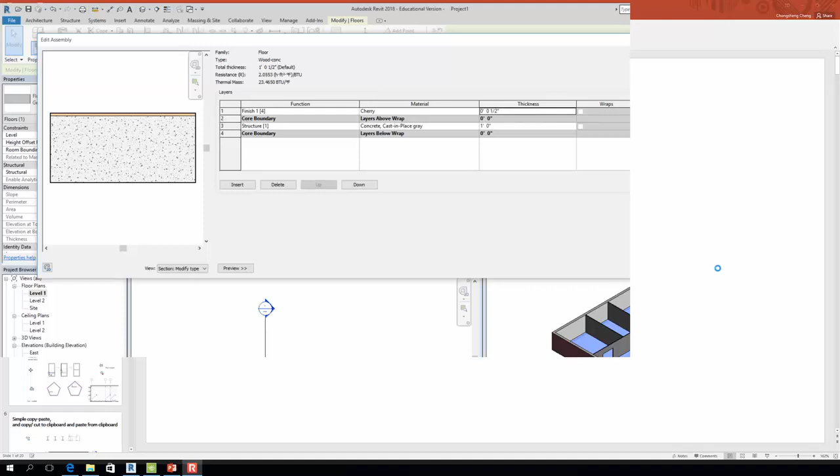Click OK, and now you can see the color change to cherry, right? Cherry color, right?

So what about I want to put a carpet? I want to put a carpet on this floor, right? Oh, I have actually a carpet on this one instead of wood. So what do you think?

Of course, we cannot draw another floor with carpet on top. Revit actually has a function they call split face and paint, right?

Let's click on modify. So modify, there's a pair. I hope I have a laser, but no, right? Here's the one, split face and paint, right?

If I stay a little bit longer, you can see the split face allows you to select one area on the surface. This area can be on the wall, can be on the floor, right? You're going to draw an area, then you use paint. Paint means I'm going to change the material, right?

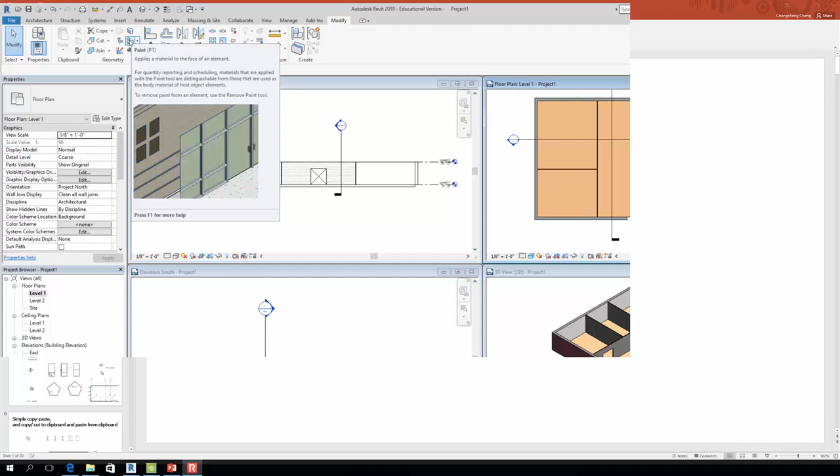You can see this, right? You can paint within an area. Basically, I'm going to create a sub area within the floor that I painted with what? A carpet, right? Let's do that.

Click on modify and move to the split face. All right. And first thing, you're going to tell the computer which floor you want to split face. You have to select. All right. Now you can see, move your cursor close to the edge of the wall, then you can see the floor shows up.

Then click on that, so the computer now knows you want to actually split the face of this floor, right? Then you can start to draw a rectangle, for example, here.

If you want to draw a circle, that's fine. So I'm going to draw a rectangle. This is my carpet, right?

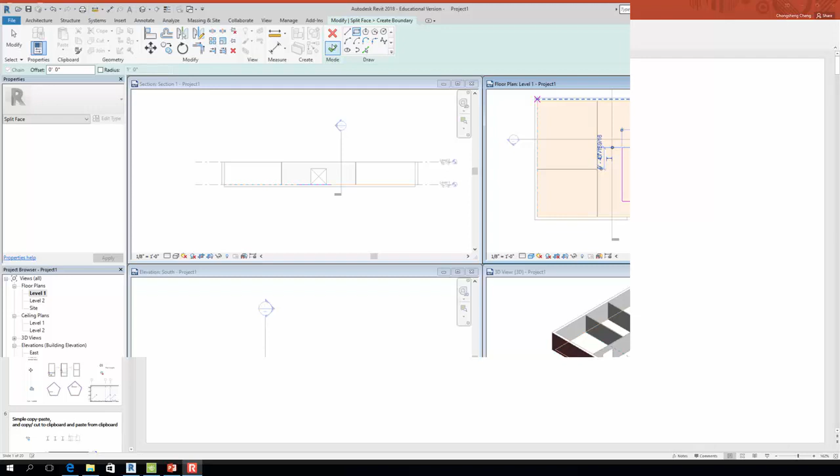So I say done. Now you can see you have a sub-region within the wood floor. Let's paint it with carpet. Go to the icon, the button, just right below the split face, and paint. Then they ask you what kind of material you want to select. Let's use carpet.

Say done. And then you move to the area you want to paint. Oh, what happened? Paint, carpet. Here, right? Oh, what happened is you actually selected outside, so then it paints everything else into carpet.

So of course you can undo this. Undo that. You can go back again and paint. Make sure you paint actually within the area instead of out, right? So you can see now this area changed to a carpet.

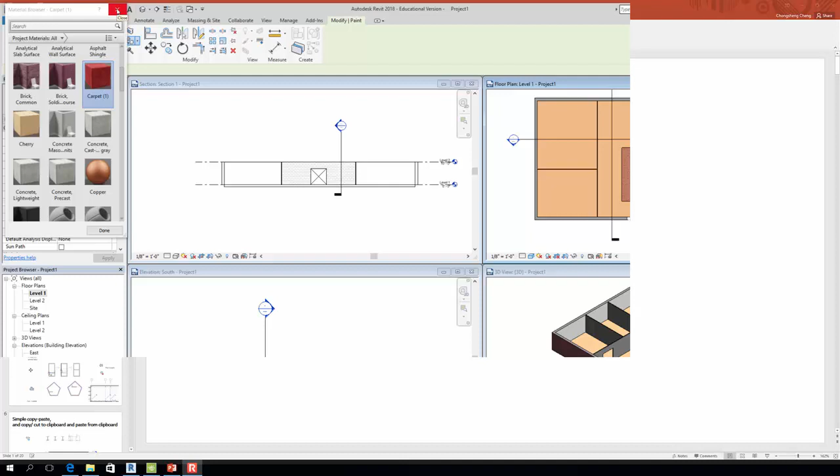So if you are a really picky person, you'd say, okay, the carpet has thickness, right? This one doesn't have thickness. That's the way you can draw. Actually, there's a real carpet in the furnishing library. You can go there to pull a carpet with thickness. But this one is just easier to do.

Easier to do. All right, let's continue to do an editing. Before we move on, let's introduce another two minutes. That should be good. Copy and paste, right?

What about we want to copy the whole item we create in the first floor to the second floor? Assuming, for example, if I have a 10-floor building like this, I want to copy it all the way.

First, you need to select using the selection box. Use a solid. The reason I want to use solid is because I don't want to select those views, those section views. So I use my solid selection box. Select everything I could, and then I go here.

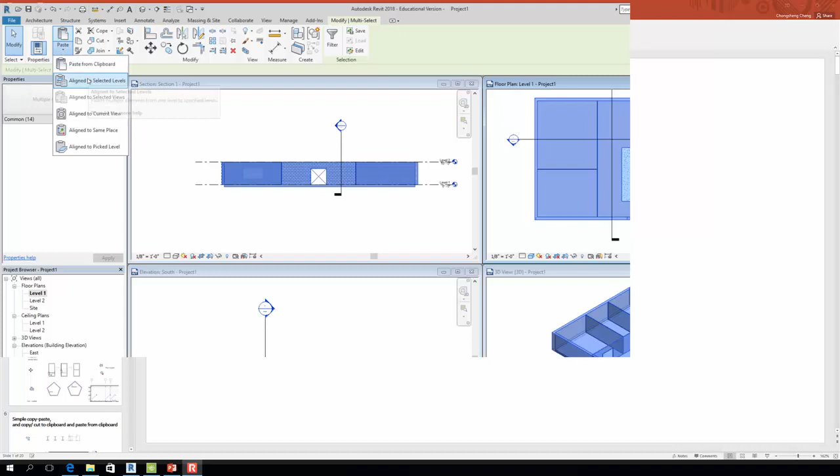So the second one, align to selected level, allows you to copy everything vertically to the level you select. Let's click on align to selected level. So choose level 2. Don't choose level 1 because you already have this in level 1.

For example, if you have 10 levels, here we'll have level 1 all the way to 10. So you select level 2 to 10, you can select all of them. Then you simply click OK.

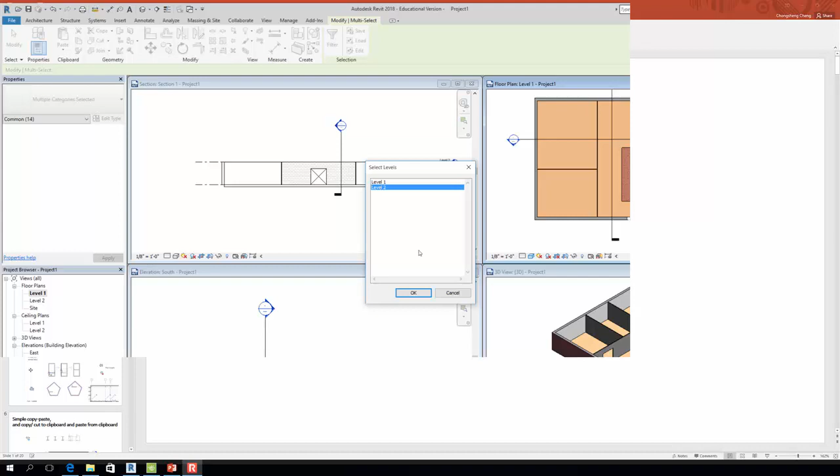What you see is, right, your stuff is copied all the way.

Let's make a cut, an opening on the floor. You're going to do the same thing as you cut an opening on the wall. But the first thing you need to do is what?

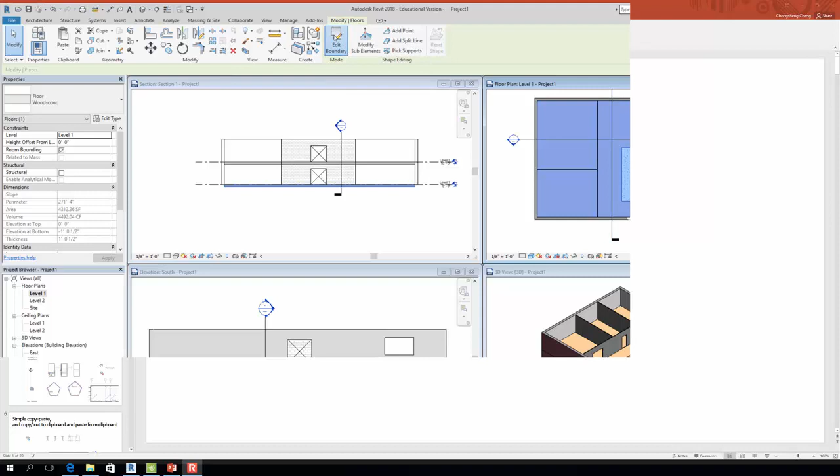Do a selection. Use your tab key again until you select that. Then we do an edit boundary. All right, so let's cut a hole.

All right, for example, if I want to cut an opening, somewhere here, that's fine. What about I want to cut a corner?

If I want to cut a corner, I can use a single line draw. I want to draw a... So when you cut a corner, you're going to use your trim key. Make sure you trim this off. All right, oh, what I did, I use trim.

If you couldn't do a perfect enclosure, you're going to have trouble. I'm going to make sure I can trim this off totally. Yes, this off totally. Yeah, make sure you got this trimmed nicely.

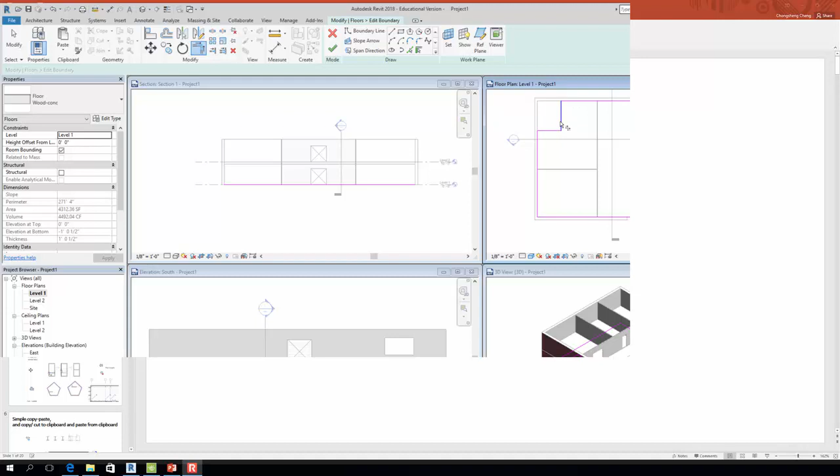So I have one opening here, I have one opening here, by changing the profile. Then after doing that, I can say done. Now you can see the 3D view. What happened is, oh, what I did, something's wrong.

Why don't I have an opening here? Because I cut it on the wrong floor. I cut it on level 1, so it must be what? If I see the bottom, I see a bottom from here, so that one probably can be used for the basement.

Yeah, make sure you cut it so the floor is going to be on the right level. Otherwise, you're going to end up with something like this.

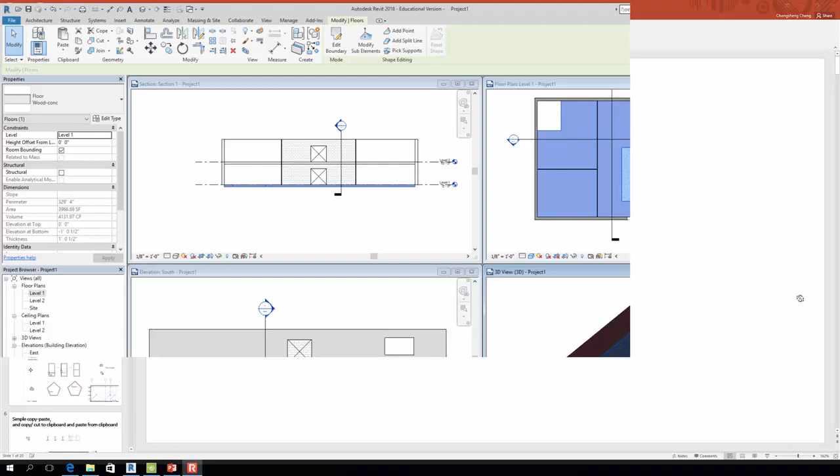So your next assignment will be on the floor, but I assume it's going to be easier compared to your homework 1, right?